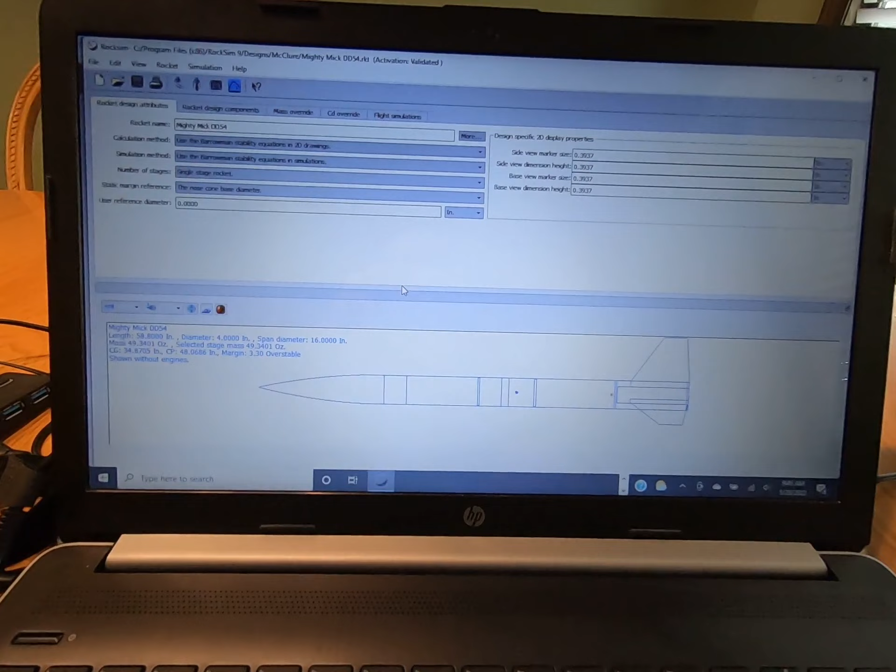The other thing that I've done is I've used RockSim. This is a proven design, but I scaled it up to get the proportions right. It's using the Estes Maxi Der Red Max nose cone, which is basically the same as the Der Red Max on the old Mighty Mick.

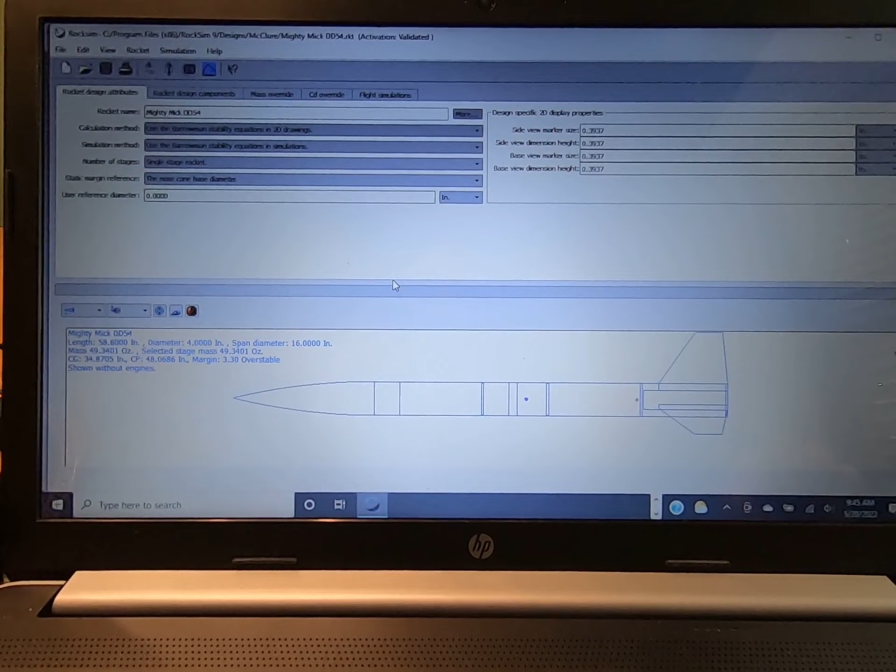That same profile. It's kind of more of a rounded profile. It's not as pointy. They don't really have that. Well, I might be able to load it into RockSim, but they didn't have it. But the biggest thing here is to get a nose cone that's basically the same shape, put it together, get the proportions right, the dimensions right.

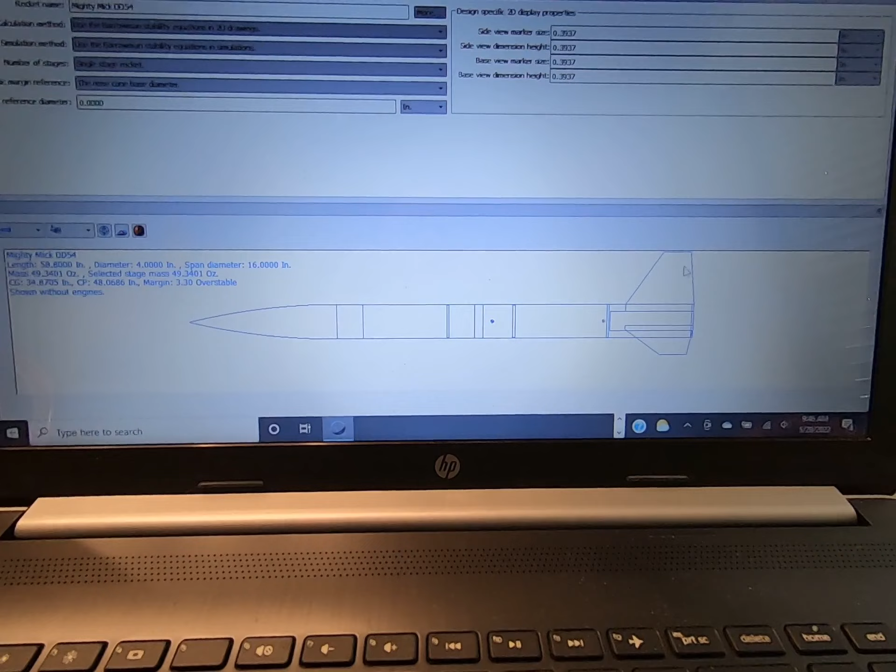You can do all kinds of stuff in RockSim, but the most important thing is this calculation of the center of pressure. And the center of pressure has to do with the geometry. You can put whatever you want inside of it. If you're using big motor mounts and bulkheads and eBays and things like that, that really affects the center of gravity. And the other way to really know that, once you've built the thing, is to check the center of gravity. That's where it balances.

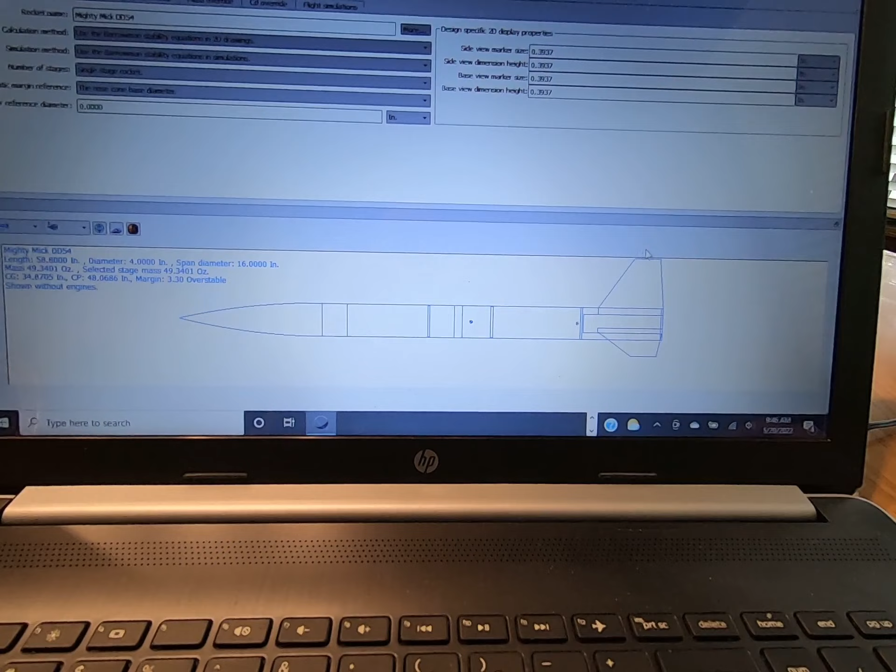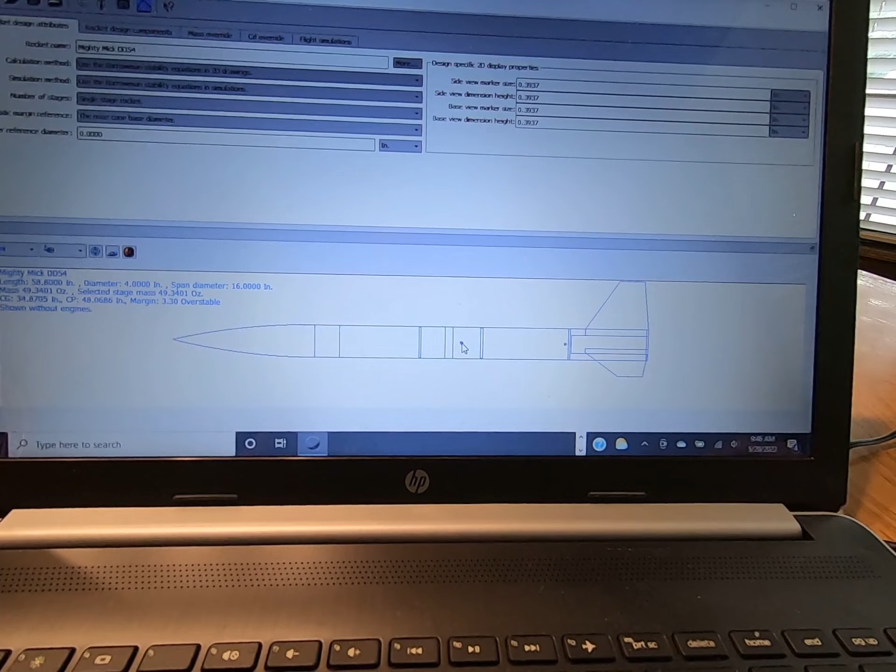The center of pressure has to do with the geometry, the size of the fins and how many there are and things like that. So that determines your stability. So you always want your center of gravity probably at least one body tube diameter, one caliber, ahead of that. The rocket will always rotate about its center of gravity. Any free body in space rotates about its center of gravity. Kind of like you see guys tossing those juggling pins. You notice how they spin funny because they're spinning about the center of gravity.

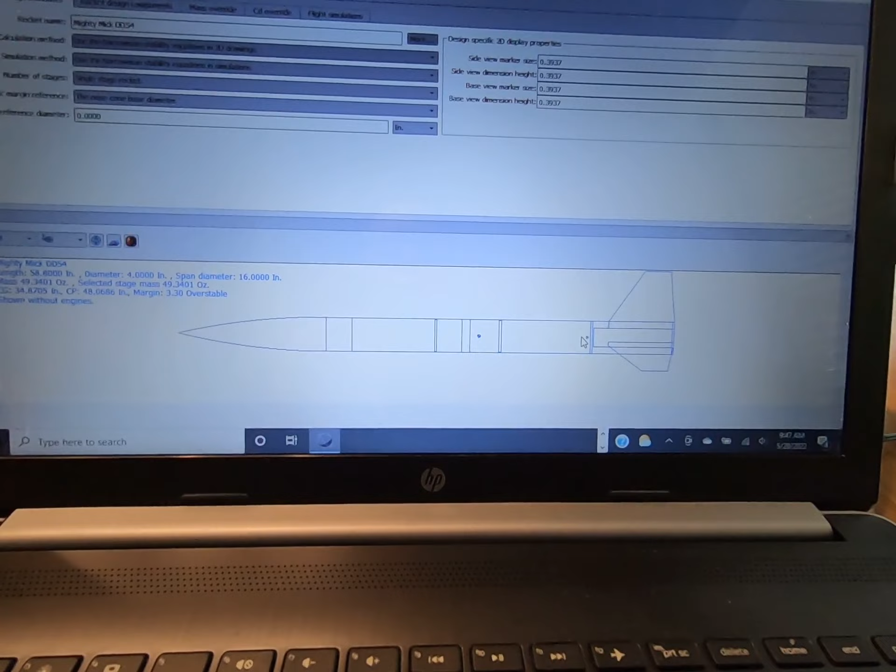The center of pressure is where the external forces work. So to stabilize it, you always want that center of gravity ahead of the center of pressure. If not, it's going to do the loop-de-loops, which you've probably seen on some of these videos. So when you're scratch building, if you use a proven design, even if you upscale it, that place where it is, it'll upscale with it. So that center of pressure will always be the same.

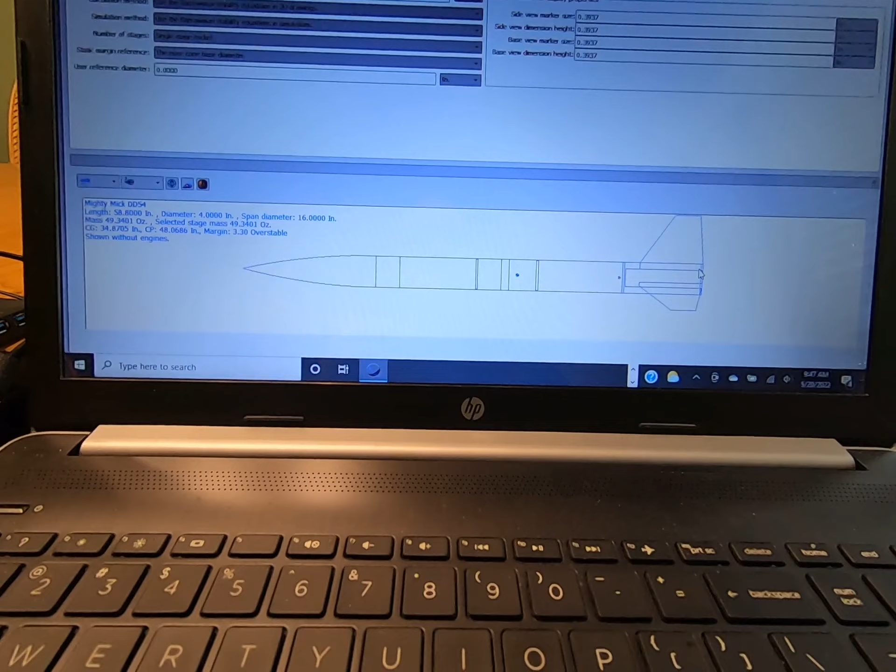And this is really just a simple 3-fin nose cone kind of rocket. What I'm doing this time is I'm going to put an electronics bay in it and put an altimeter, and we're going to go dual deploy. It's going to have a 54 millimeter motor mount. So blah, blah, blah. What you can do in RockSim is print out the fin pattern, which really helps. So I've got that printed out. Next we're going to go out to the shop, and I've been putting together the quote unquote kit and I'll show you what that is.

It's all LOC tube and like the Maxi Der Red Max 4-inch nose cone, which unfortunately right now they're not available. Months back I had bought 3 of them just because they were on the website. And the original one was actually turned by Gordon Agnello, Sandman. So back 17 years ago, he actually made me the first one, which is made out of balsa, and I covered it in fiberglass. But anyhow, kind of rambling, but let's get out to the shop and look at the parts to build the upscale Mighty Mick dual deploy.

Here we are back out in the shop. So I just finished this one. This is the Mighty Mick I built to replace this one. This was the old original one. You can see I kind of sanded it back, but it got cracked. The body tube, the airframe, got cracked when it hit a big old rock at Alamosa. And just a little tip here: if you're flying at higher altitudes, you need a bigger parachute, because it kind of came down fast and hard. So the old one's busted.

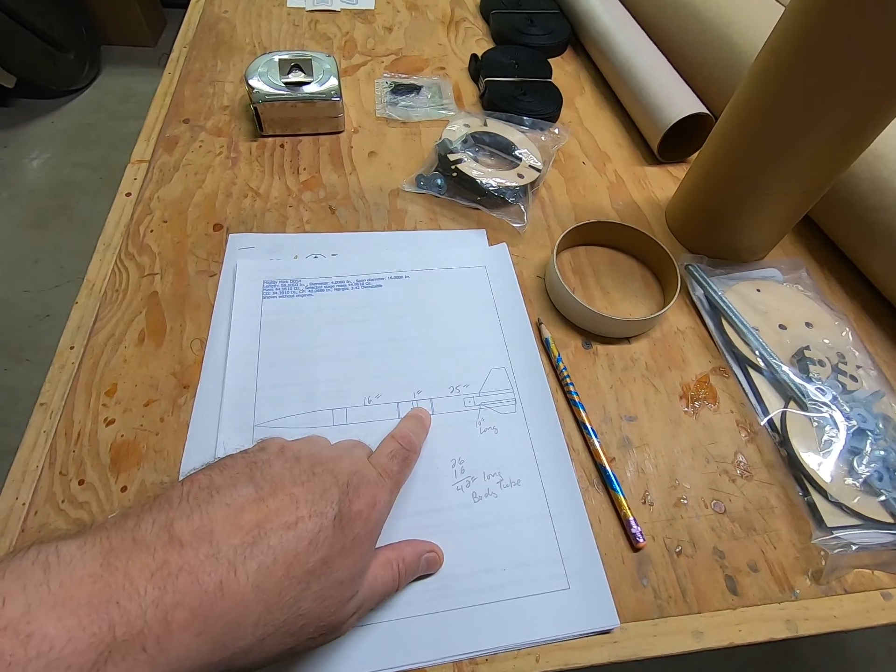I wanted to move the electronics bay a little further forward to give more room in this back end for the drogue chute and recovery harness. When I was looking at it, there's not much room there with the motor tube and the back end of this electronics bay. So I kind of moved things forward. The overall length is still the same. It's just basically shifting things.

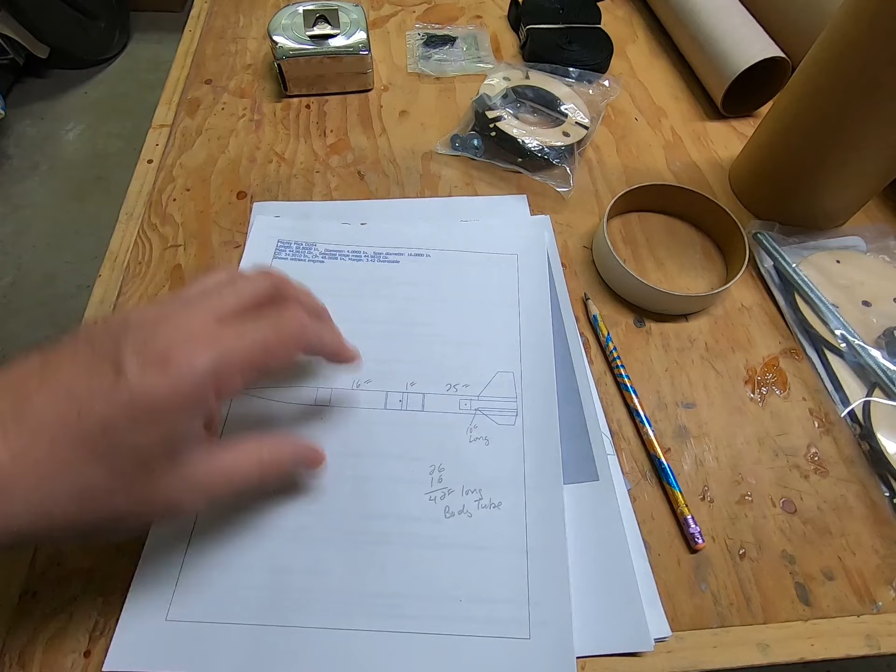So, once I got out here and started looking at it, I didn't go on the computer and redesign it, but RockSim does give you a bill of materials. So it'll tell you, body tube, LOC Precision, 3.9. Of course, there's where I scribbled it out. It was 18 inches. Now it's a 16-inch length.

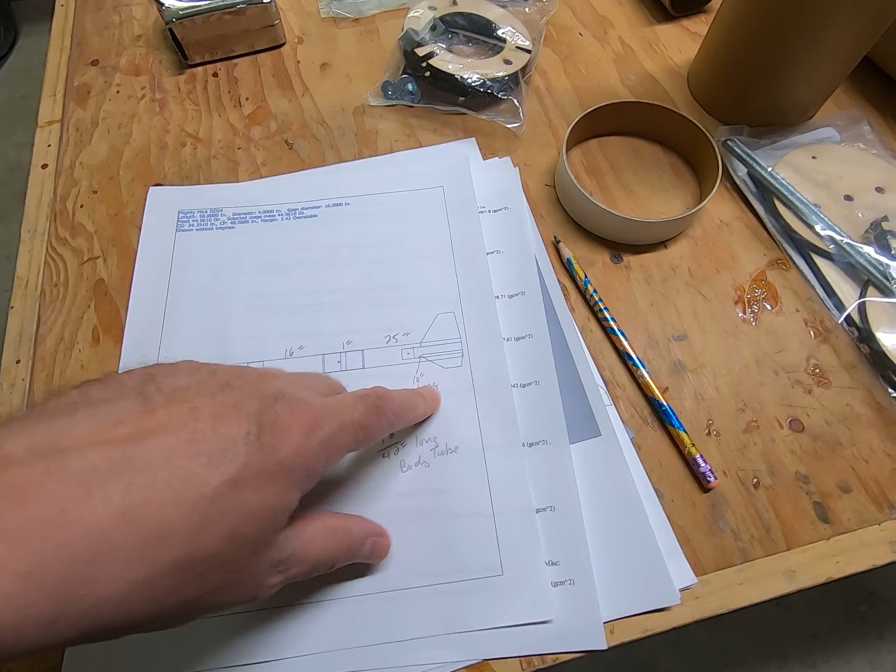So 16-inch, 25-inch. The other good thing it does, it will give you the full-size fin pattern to cut it out. The printer's smaller than the fin, so it gives you two pieces, but you tape those together and then use those to outline it on your plywood. A few more scribbly things. That's the fin that I used on the old version.

These are all going to be through the wall. So there's the order form from LOC. So you basically build your own kit. I've got aircraft ply, birch ply, a big box of it over here. That's my fin stock. I stocked up on that months ago. So I'll use that for the fins. It'll be 1/4-inch ply.

I thought about fiberglassing these tubes. You get a nice finish, but it adds a lot of weight. And with more weight, there's a bigger parachute and bigger motors. It's tougher, but I don't know if it really lasts that much longer. You don't get as many chips and dents and dings when you fiberglass the tube. So I think for this one, I'm going to keep it simple and just use the plain cardboard tubes. It's been done that way for years.

I'm level 1 certified, so it's not like I'm going to be flying J and K motors and going to thousands and thousands of feet. I typically fly my rockets in the 1,500 to 2,500 foot altitude range and keep them close with dual deployment. So that's basically the kit roundup of parts for this thing. Then we'll put things away and get started assembling, and I'll go through it step by step with you.